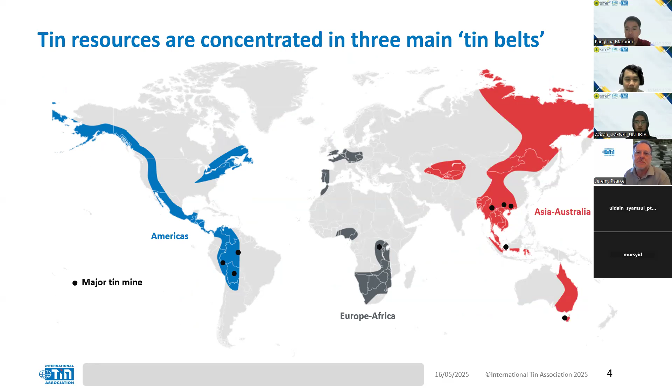So the tin resources are concentrated here in three main belts. You can see here in this diagram. The black one in the middle is the European belt with Africa, the Asian belt, which is over your side of the world there, and the South American belt. So this explains why these tin producers are in these places, because that's where the tin is.

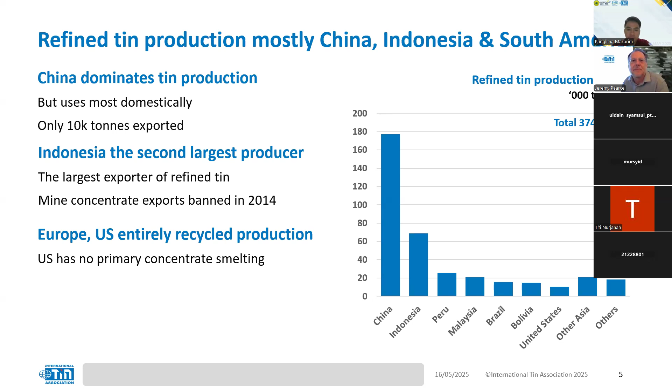8% is lead acid batteries, so that's in your car and elsewhere. And tin copper products are also very important. Those are bronzes and other things. It's a long time since the Bronze Age, but bronze is still widely used. And lots of alloys as well. Molten tin is used to make glass windows flat. You may not realize that. So you can see here how important tin is to our world.

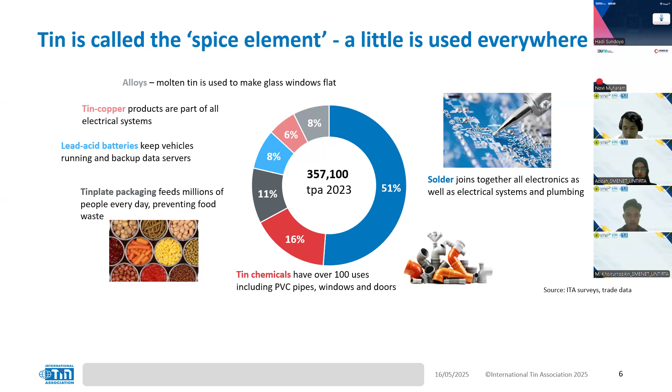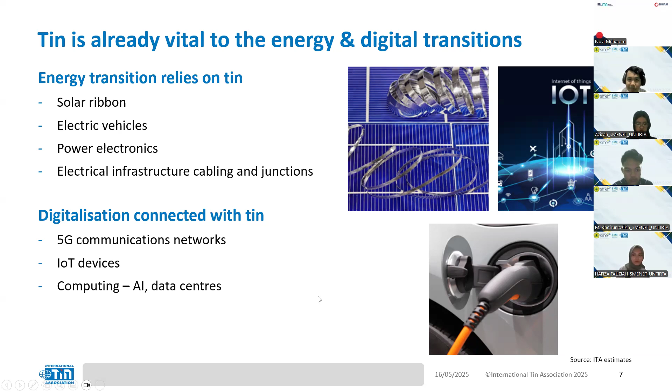If you think about electric vehicles, the glue that holds all the electronics together there, if you think about power electronics, think about everything that's needed for renewable energy, tin has to be very, very important. Not just that, but also digitalization. So we have 5G and the Internet of Things and all the communication networks, everything to do with AI, to do with data centers. Every single data byte has to go through millions of solder joints. So it's very easy to understand why tin is already vitally important.

But I guess this is mainly the reason why we wanted to talk to you today, because we are now seeing a lot of new opportunities for tin in R&D. Tin is such an amazing metal. It has so many different properties that it can do lots of different things. And that means that when you're looking at the technologies we need for energy transition, lots of different opportunities are coming along. And we're starting to look at some of those.

So Georgia is going to talk a little bit in a moment about sodium-ion batteries, which is one of the latest new energy technologies. That's very, very interesting for tin. But there are lots of others. For example, I mentioned already the solar materials, but there's a new material called perovskites, which you may have heard of, which is a very thin, invisible coat of material that we put on windows, for example, rather than on panels as they are today. And those are made with tin.

Thermal transfer: there's a big new investment in the US in batteries which use tin metal for thermal transfer. Carbon capture catalyst, carbon capture very important. So tin is very catalytic, so we're seeing that there too. Fuel cell catalyst, many, many other different ones. And we're tracking lots of other new applications in water treatment, electronic materials, even quantum computing, would you believe? Tin is vital to quantum computing.

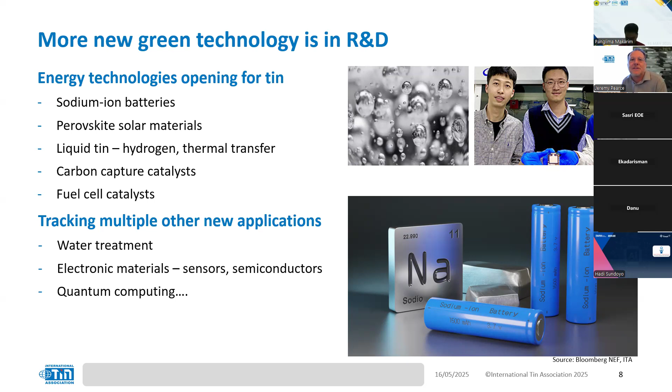So this gives you an example of the kind of things. We're tracking hundreds of new scientific papers on tin at the moment, and it's very, very interesting. So what we want to do as the Tin Association, we want to create some spaces, and that's why we're so keen to be with you today. We want to open up some spaces where people can come together, tin researchers from all over the world. We can showcase tin technologies and see some of the examples that I've highlighted, show how important tin is going to be for the future. And what we really want to do is encourage those conversations and accelerate the innovation.

We're going to focus on two strategic topics: tin in sodium-ion batteries and tin recovery from e-waste. Both of those we think are going to be the two most important topics for tin in the near future. Tin in sodium-ion batteries because it's a huge potential use of tin, and tin recovery from e-waste because we really do need a lot more tin very fast, and we think that's the best way that we can have that new stream of tin from e-waste.

We also want to introduce the tin industry, and so all of our tin producer members have exhibit booths inside this innovation hub I'm talking about, with lots of presentations. It's called Tin Valley, which is like the Silicon Valley for tin. And I think some of you may be already signed up to it, and if you haven't signed up already, then you're welcome to contact Georgia and sign up here.

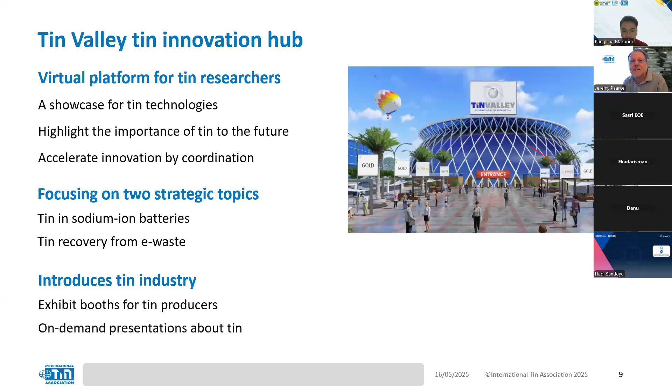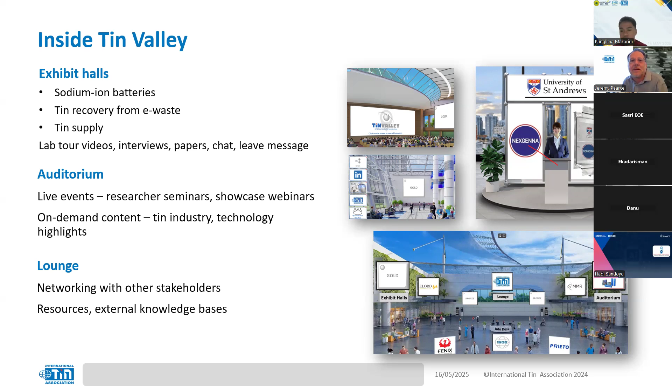Inside Tin Valley, you'll see these exhibit halls here with the booths like this one, with the universities and companies and startups already showing us some of these new developments. You can have a look through those together with the information that they have. There's the auditorium there. We have some live events. We have a live event on tin in sodium-ion batteries coming up shortly in June, another one on e-waste in September. There's lots of on-demand content too. Once you sign up, you can see all of those things. And there's a lot of functionality to network with other stakeholders and other people who are inside this space. So please do come into this space, find out more about tin, and get involved in what we're trying to do.

But we also want to do what we're doing today. We want to build tin researcher communities out in regions as well, real-life tin communities. Already we're starting to work in China and start building communities there. But in other places too, in Europe, we have good contacts with Fraunhofer and some of the other universities there, in the US too, and in Malaysia. But here in Indonesia, we're very happy to be in touch with you and to start building these communities there, to start talking and working together about how we can collaborate, how we can get some funding and start to do some exciting and new interesting projects together. So that's our objective and something we can help to do.

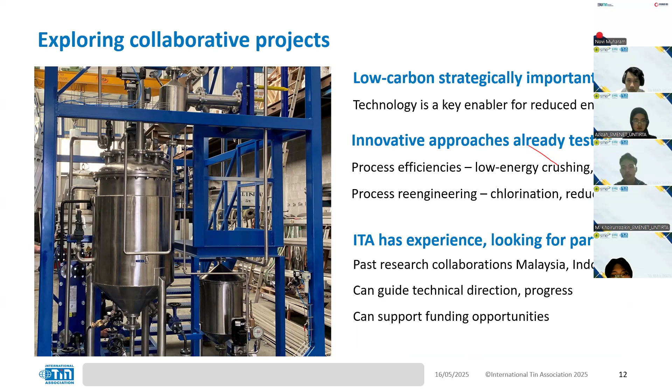And we can work with PT Timah in helping you to do that too. So with these ideas in mind, we think that these are the kind of projects that we might want to think about, apart from what we've already mentioned. These are low carbon projects, for example. So reducing carbon footprint is extremely important for the tin industry as it is for everybody else.

And technology is the key to all of those things. So we already tried a lot of different things in the past, and we want to explore those again. So how can we make the process of tin extraction more efficient? How can we use low energy crushing, for example? There are many different ways to crush things that are much lower energy. How can we deal with the fines, which is a particular problem in Indonesia?

I have to highlight that one. How can we deal with the fines content? That causes a lot of losses, and there are ways to do that. Plus, how can we re-engineer the whole process of tin? How can we look at that in a radical new way?

And for example, chlorination: instead of taking the tin ore and smelting it to tin and then adding chlorine to make a tin chloride, why can't we just go straight from the ore to a tin chloride? Well, you can, and we've done that already, and we can show you how to do that.

Why can't we, instead of using carbon, use hydrogen to reduce tin and make metal? Well, you can, and a paper has just been published on that from Freiberg in Germany last week. So we want to look at hydrogen to make tin from ore, for example. These are very exciting, new, interesting areas, and we'd really like to talk to you about how we can do those things.

We do have the experience. We've already had past research collaborations, including in Indonesia with tekMIRA and several others in the past. We can guide the technical direction, we can guide the progress, and we can support the funding opportunities. So that's what I would like to do if we can. Thank you for that.

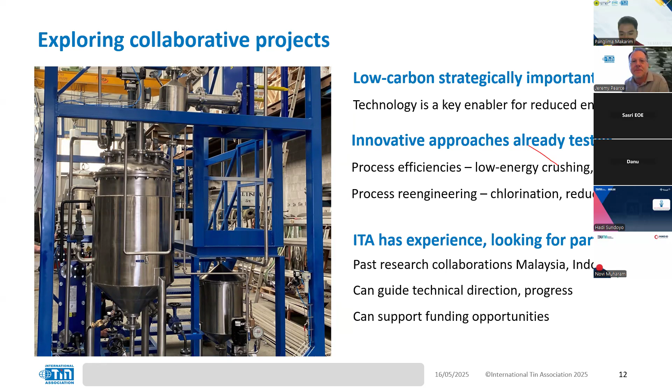Thank you very much, Dr. Pearce, for your informative presentation on the International Tin Association, Tin Valley, and the current tin markets.

Now it is my pleasure to introduce our next speaker, Ms. Georgia Laurie, a technologist at the International Tin Association. Ms. Laurie holds a degree in chemistry from Loughborough University and has been instrumental in advancing the Tin Valley initiative, a pioneering innovation hub dedicated to the sustainable development of tin applications. Her work focuses on exploring tin's expanding role in emerging technologies, including electric vehicles, photovoltaics, and sodium-ion batteries.

Today, Ms. Laurie will share her insights on the progress of the Tin Valley Initiative and its impact on the industry's future. Please join me in welcoming Ms. Laurie. And Ms. Laurie, the floor is yours.

Thank you very much. I'm just going to share my screen. Hopefully you can see that presentation. Yes, we can. Perfect.

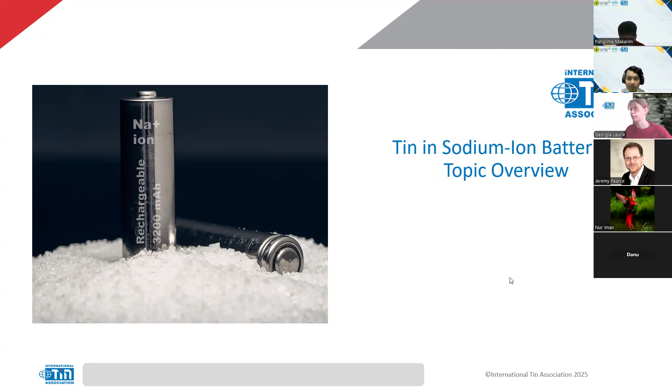So hello, everyone. I'm going to give a brief presentation to introduce two key technology topics: tin in sodium-ion batteries and tin recovery from e-waste. So I'll start with the topic of tin in sodium-ion batteries. Sodium-ion batteries, or SIBs, are a promising alternative to lithium-ion batteries. They work in the same way as lithium-ion batteries, just with the replacement of lithium ions with sodium.

So there are several advantages to SIBs. One reason is that on a resource level, sodium is more abundant in the Earth's crust, making its supply chain more reliable, which drives down the cost of resources, meaning that sodium is cheap. Lithium, on the other hand, is a more scarce resource; its reserves are less than 0.01% of the Earth's crust, with current high demand and supply chain constraints leading to price volatility.

Another benefit is that sodium-ion batteries are easier to transport, so they can be transported at 0 volts, whereas lithium-ion batteries cannot, and they face strict regulations due to safety concerns because they have a higher risk of thermal runaway fires compared to sodium, which can be really deadly and difficult to control.

Additionally, the use of sodium enables the use of aluminium current collectors at both electrodes, whereas lithium-ion batteries conventionally use copper current collectors. So this is good because aluminium is lighter and cheaper than copper, so we get to have cheaper and lighter batteries.

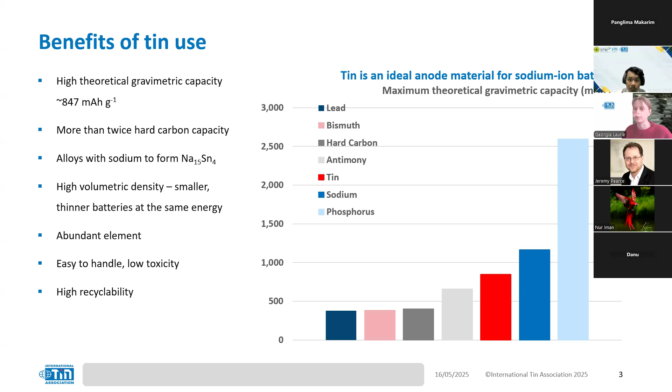If we look at phosphorus and sodium as well, they both exhibit high gravimetric capacities, but they suffer from issues including volume expansion, sluggish reaction kinetics, and sometimes complex synthesis processes for phosphorus. And then sodium anodes suffer from dendrite formation. So what I mean by dendrites is they are branches of sodium that are formed inside the battery. And these branches can be sharp and they can pierce parts of the battery, leading to short circuits. So because of these issues, tin appears to be an appropriate choice for a great anode material in sodium-ion batteries, but it doesn't come without its own issues.

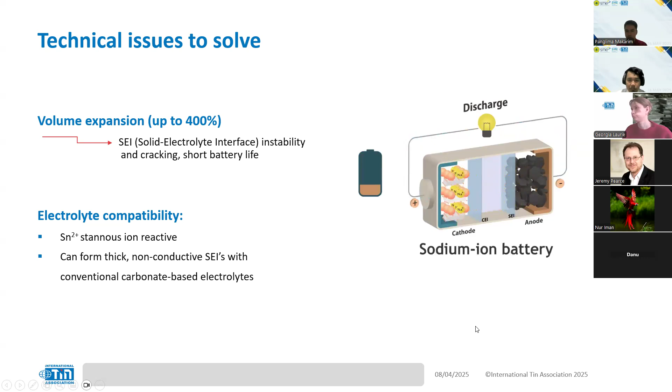So the question is, how can we overcome these challenges? And there have been solutions that have been developed, which is fantastic. So if we look at the issue of volume expansion, some of the methods being used are nanostructuring, for example, which uses very, very tiny nanoparticles of tin, which, because they're so small, have a larger surface area and create a more flexible material. And so because of this, they can better accommodate the volume expansion and avoid cracking.

Additionally, we can alloy tin with other metals, or we can form composites with materials like carbon, for example. And these materials can help to buffer the volume expansion by, again, increasing flexibility and also absorbing some of that expansion. So if we look at tin hard carbon, for example, these composites can use porous carbon materials, which essentially have holes in them for tin, which not only makes it more flexible, but also creates a matrix that can hold tin in position.

If we look at the issue of reactivity with the electrolyte, there have been some solutions developed, such as the development of glyme-based electrolytes. So these are more compatible electrolytes with tin anodes specifically. So these electrolytes form thinner and more stable SEIs and react less aggressively with tin. So we don't get the same issues that we were seeing with the more conventional electrolyte materials.

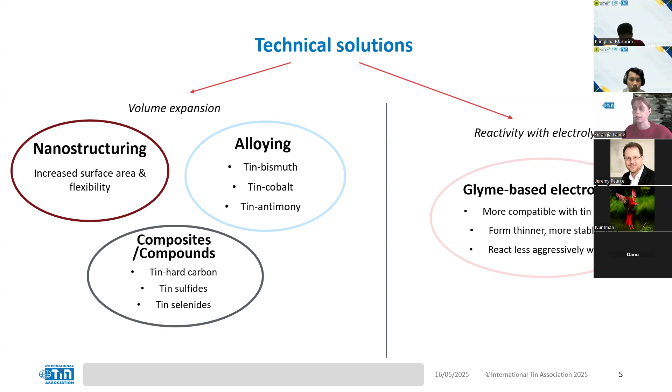But it's important to note that tin anode research is less advanced than hard carbon research, for example. But further research and development could boost tin anodes to be even more competitive because of the unique advantages of tin in this scenario.

At ITA, we are tracking developments in academia regarding tin anode materials. Some of the most common research materials in the last year include tin selenides, tin sulfides, tin carbon materials, tin oxide, and also elemental tin/tin alloys. You can see a lot of different examples of tin composites here.

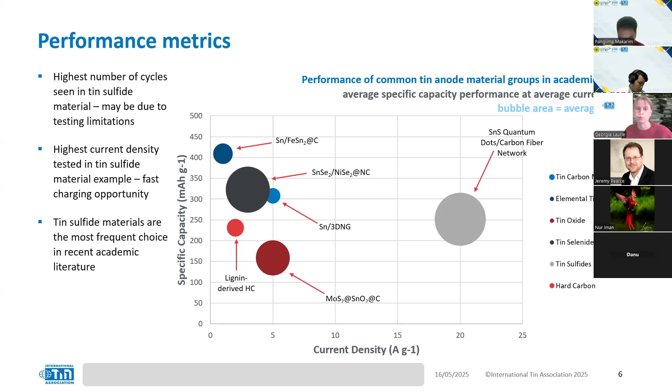In terms of development, research into tin-based anodes for sodium-ion batteries has been on the rise, particularly over the past decade, with 995 academic papers between 2015 and April 2025, expected to grow in the second part of this year. Of these, 72% originated from research in China, 11% from the US, 9% from South Korea, and 6% from Australia.

This again highlights China's dominance in the sodium-ion battery field, further emphasized by their government backing and resource dominance. China is also dominating in the commercial field of sodium-ion batteries, with battery giants such as CATL, BYD, and also HiNa Battery.

There are also companies implementing tin anodes into their sodium-ion battery technologies commercially. We have two contacts we are in touch with: Unigrid in Sweden and Nanode in Canada, both using tin anodes already in their sodium-ion batteries. We're also aware of existing sodium-ion battery companies evaluating tin as a viable option for their technologies. We hope to see more companies doing this in the near future.

A good place to start is defining what e-waste actually is. E-waste, or electronic waste, is discarded electronics that have reached their end of life. It encompasses a large range of products, from laptops and phones to irons and vapes, or even EV batteries. We require electronic products not only for everyday life, but for the transition to cleaner energy. The issue is that e-waste is now the fastest growing waste stream globally, with 62 billion kilograms generated in 2022. Of this, only 22% was recycled, with the remainder being dumped or shipped to developing countries without the infrastructure to safely and efficiently recycle it. This is a shame because the metal content in e-waste is often higher than that from mining, so efficient e-waste recycling is essential.

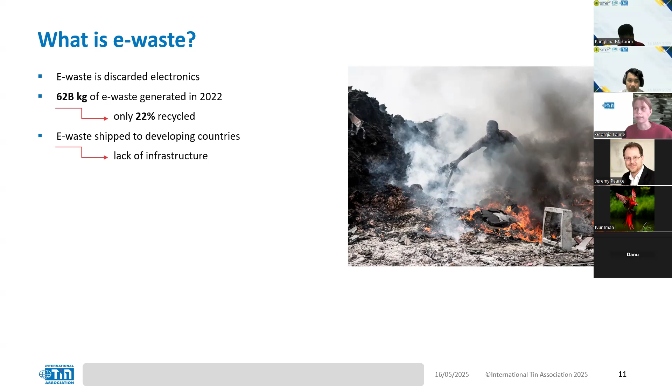So where does tin come into play? Tin is an essential part of electronics, used for soldering components and ensuring electrical connections throughout. Printed circuit boards, PCBs, which are an integral part of electronics, contain an average of 3% tin. So this potential secondary supply of tin from urban mining e-waste is essential now more than ever as the demand for tin rises.

Focus in industry, however, is often on the recovery of other metals from e-waste, such as gold, other precious metals, and copper. But people are actually not aware of the quantity and value of tin in e-waste.

If we look at the global landscape of e-waste generation, it's clear that e-waste production is highest in Asia, which can be linked to Asia's large population. But if we look at it from an e-waste generation per capita, so per person, Europe is actually highest, meaning Europe has more electronic devices per person than any other part of the world.

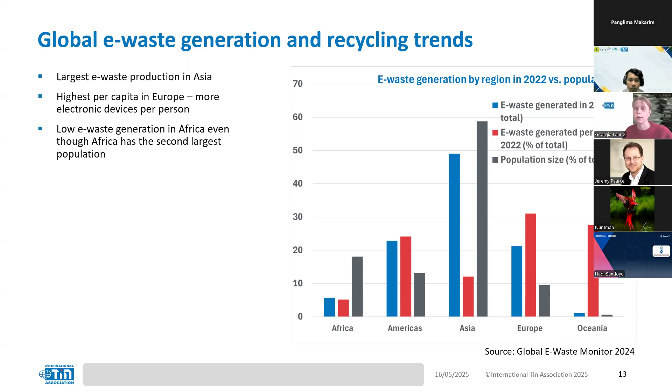In terms of recycling rates of e-waste, Europe has the highest rates. This is due to principles in place such as the extended producer responsibility, or EPR principle, which holds electronics companies accountable for their products once they reach end of life. We can also see high recycling rates in Oceania, particularly due to recycling giants being positioned within parts of the continent with large populations, such as Sircel in Australia and Mint Innovation in New Zealand.

But more is needed globally to tackle the rise in e-waste and to ensure valuable metals are being recovered.

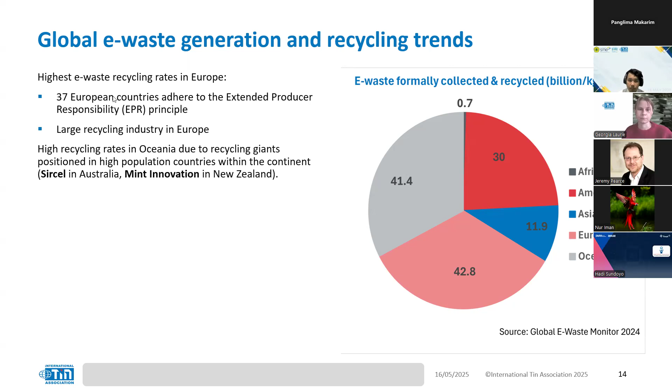If we look at e-waste itself, it comes in many shapes and sizes, and a crucial part of a lot of e-waste products are printed circuit boards. PCBs are usually concentrated with valuable metals for recovery, and so are targeted by recyclers. You can find these in phones and laptops, for example. They are made up of roughly 30 to 50% metal and 50 to 70% non-metal, again with an average of about 3% tin. One downside is that they also contain hazardous materials, including lead and flame retardants, that can be problematic for recyclers.

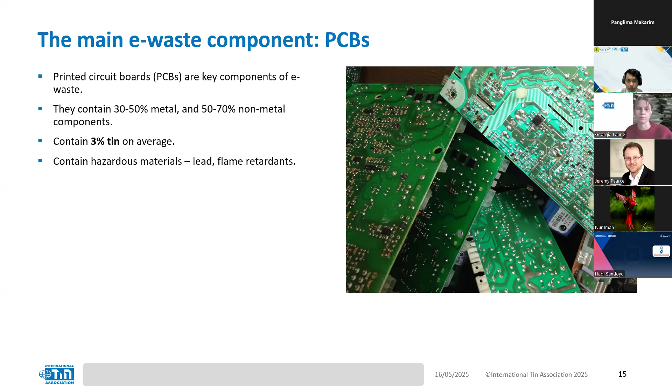So how do we recycle PCBs, and what are the most effective methods? To start, e-waste needs to be sorted and dismantled to isolate PCBs for metal recovery. This can be done manually, but it's time consuming, not cost effective, and also dangerous for workers, so it's highly recommended to be avoided.

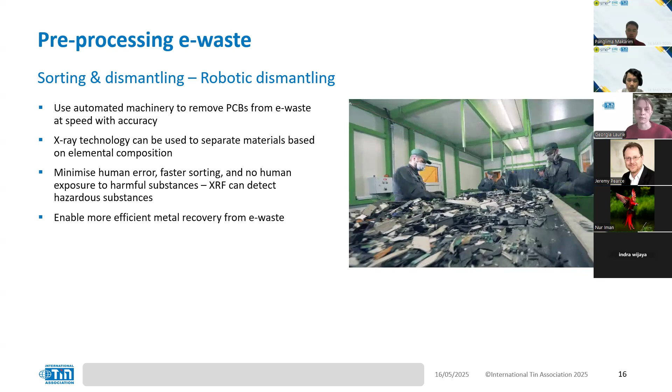Robotic and automated machinery is actually the best way forward, and we can also include spectroscopy methods. XRF, for example, can be used to identify elemental composition in components to help separate different parts of e-waste based on what they have inside.

So once PCBs are isolated and sorted from the bulk of material, there are many different processing routes that can be followed to recover tin amongst other metals.

If we look at a direct route for tin specifically, we could use chemical or thermal depopulation, which directly removes the solder material. Thermal depopulation uses heat to melt the soldering material, along with external force, such as shaking a board, to help remove the PCB components while melting the solder. Chemical depopulation is similar in that it uses chemicals to dissolve solder and recover metals.

The International Tin Research Institute, which is now ITA as we know it, collaborated with Ultromex in the past to use ferric chloride and nitric acid to recover tin from PCBs. And in fact, Jeremy was a part of that project.

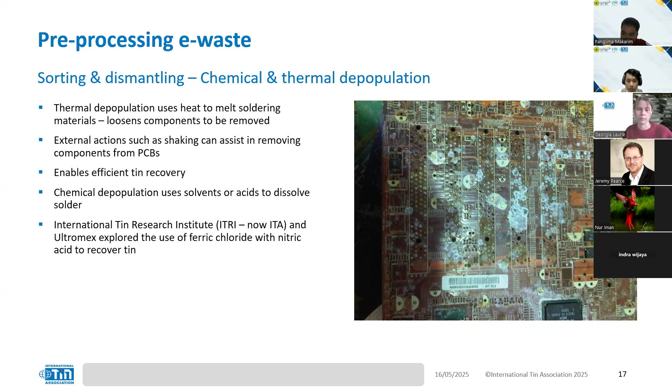An alternative route is to start by shredding the PCB material. If recycling companies want to target more metals and bulk recover metals from PCBs, they can start with techniques such as shredding the material. The perks of shredding are reducing the volumes of e-waste, making it much easier to handle as it can be condensed. For example, if we were to place a lot of PCBs into an acid bath or into a furnace, if the material is shredded up and condensed, it's a lot easier to fit more material into the furnace or the acid bath.

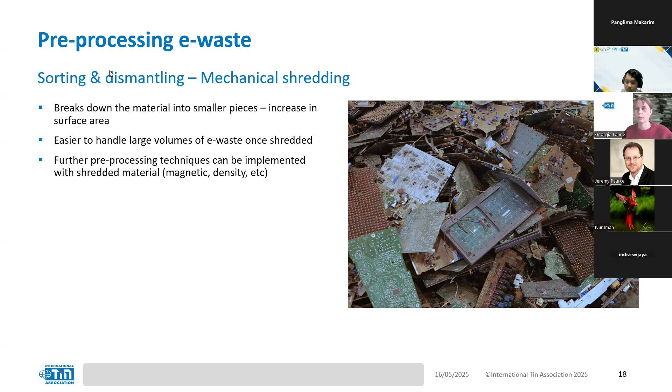This is also good because shredded material enables further pre-processing techniques to be employed, such as magnetic, eddy current, and density separation. Magnetic separation is self-explanatory in that it separates magnetic ferrous metals such as iron and steel from non-magnetic, non-ferrous metals such as tin, copper, aluminium.

Eddy current separation actually separates non-ferrous metals from each other based on varying conductivities. So in some cases, we can separate tin from aluminium, for example. And then we also have density separation, which separates components based on weight, either in an air or water-based environment.

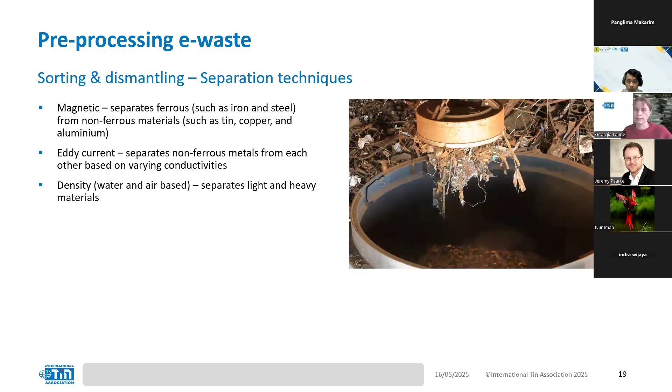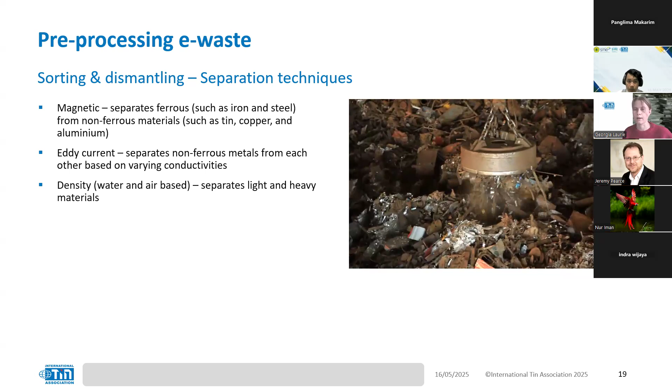These are really great methods just for initial separations of metals. And the reason this is great is because it makes it a lot easier down the line if we have metals broken up into different groups so that they can avoid interfering with each other as much in later processing.

One of the major metal recovery routes is hydrometallurgy. This involves using aqueous solutions such as acids or alkalis to recover metals from e-waste. The core steps usually involve leaching tin into solution, separating and purifying the tin-laden solution to recover the tin.

Leaching tin from e-waste using acidic solutions requires careful reaction conditions. Simple acids alone can sometimes struggle with leaching tin. It's found that using an oxidant improves the solubility of tin ions. For example, a recent study combined hydrochloric acid with sodium chloride to enrich the chloride content, which resulted in almost 95% tin leaching from the PCB material.

But the one challenge really with acid leaching is reprecipitation when tin 2 plus is oxidized to insoluble tin 4 plus.

Alkaline leaching, on the other hand, uses strong bases to dissolve tin, forming soluble stannate products. One of the main advantages of this over acidic is it's more selective for tin and lead, for example, and can leave behind less soluble metals in alkaline media, such as gold.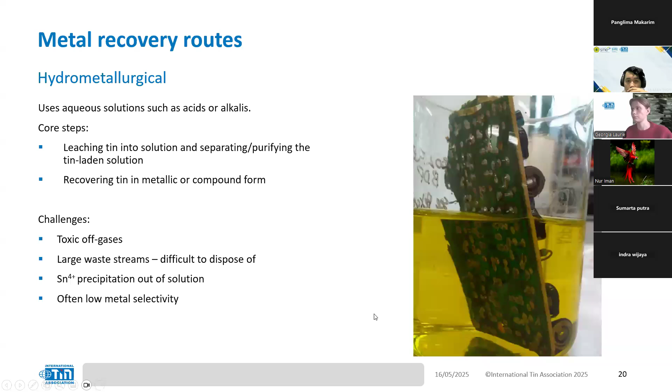Another major metal recovery route is pyrometallurgy, which uses high temperatures to liberate and separate metals from e-waste. Pyrometallurgical methods encompass various methods, including incineration, smelting, and also more novel techniques like flash joule heating.

Incineration involves burning e-waste in the presence of oxygen, primarily to oxidize and remove organic substances, such as plastics and resins, and then concentrate the metals in the remaining ash. This is usually a pre-treatment step to reduce e-waste volume and produce metal-rich residue. The residue can be further refined via smelting or leaching. After incineration, tin is often left behind mostly as an oxide or metal particles mixed with other ash constituents.

Modern incinerators include off-gas filtration systems, so they can capture any metal-bearing dust or vapor for further refinement. Smelting, on the other hand, is another core method for metal recovery, and obviously is already used at industrial scale. So during smelting, e-waste is melted inside a furnace at high temperatures with the goal of segregating metals into a molten metallic phase and a molten slag phase.

So by adding appropriate fluxes and reductants, the smelting process can be tuned so that valuable metals collect in the metal alloy at the bottom of the furnace, while other oxides of less value go into the slag. So industrial smelters can mitigate metal losses by operating under slightly reducing conditions and also capturing those furnace off-gases.

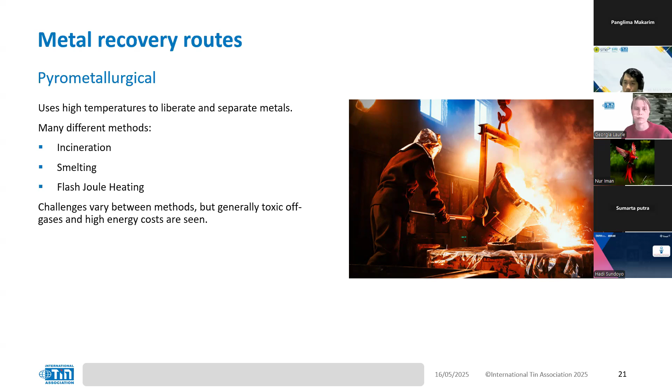So while pyrometallurgical methods are effective for processing large volumes of e-waste, they do require high energy input and often result in higher emissions. And additionally, further refining processes are typically needed to extract pure tin. But despite these challenges, pyrometallurgy offers a promising solution for the sustainable recovery of tin, especially as demand grows.

So if we look at some next generation innovations that are being explored to recover tin from e-waste, deep eutectic solvents are an example. They are a mixture of solvents that form a eutectic mixture with a lower melting point than any of the individual solvents. This is great because it tends to use greener and less toxic solvents, but it also means that we can melt that mixture at a lower temperature, so we don't have to use temperatures as high. And we can tune these mixtures by altering ratios and concentrations to alter its properties, depending on our target metal, for example. So this method is being trialed not only in academic literature, but commercially.

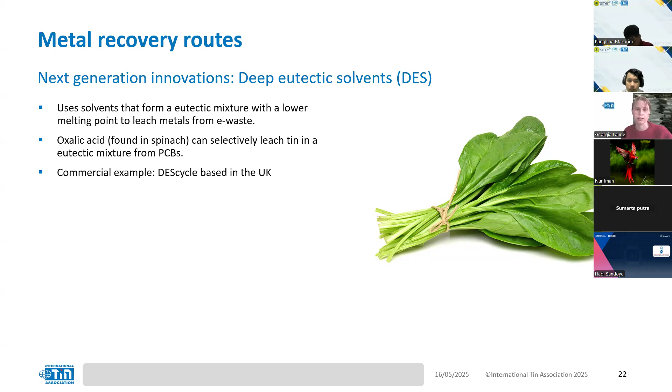Another example is bioleaching, which uses living organisms to extract metals from circuit boards. So we don't need to buy toxic chemicals. We can get living organisms to do it for us. An example of this in academic literature is that academics used two types of microorganisms to leach tin from powdered PCBs. And in fact, after 28 days at 31 degrees Celsius, they leached over 96% of tin. But the challenges they addressed in this paper were scalability as a potential drawback and also leaching time. But bioleaching is definitely being trialled commercially. One example is Bioscope in the UK, who are looking to optimize the time and scalability of this process.

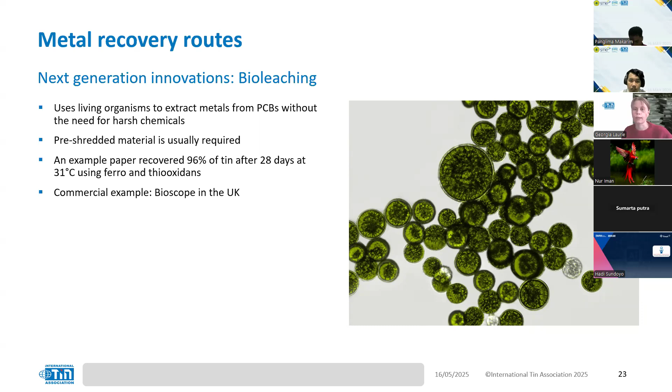And finally, one final way to improve the recyclability of e-waste is actually adapting the design of PCBs themselves. This is being explored by several companies globally. One example is Jiva Materials in the UK. They specialize in their Soluboard design, which is a PCB made of materials that can dissolve in hot water. So this is fantastic for the recyclability of the metals. Their Soluboard has a 67% lower carbon footprint compared to traditional technologies.

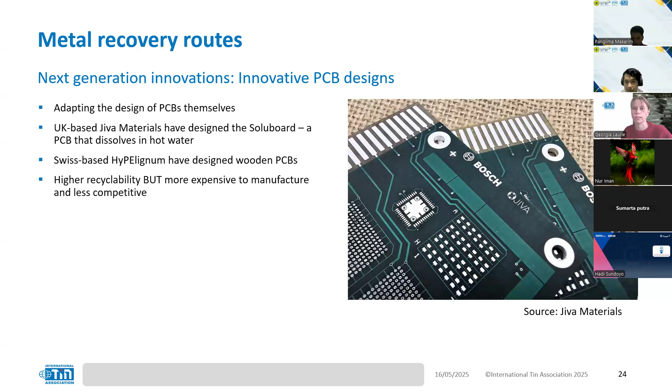But one drawback is the cost to manufacture more sustainable PCBs, which does make them less competitive. And also they need to be designed to endure heat and moisture effectively. So further optimization is likely needed.

So if we just quickly look at the research and commercial activity in this area, academic papers have been on the rise in the last 2 decades. The 3 countries with the largest number of tin recovery papers are China with 25%, India with 13%, and South Korea with 8%. So actually this highlights that there is a high concentration of research in Asia, which funnily enough is the region with the highest e-waste output.

There are also e-waste recycling facilities populated all over the world, with this industry growing year by year. So some examples include Aurubis in Belgium, who are known mostly for copper recycling, but they are also a tin and partially an e-waste recycler. Sircel in Australia, they're actually Australia's biggest e-waste recycler, and also Attero in India, they're India's biggest e-waste recycler.

So not only are companies doing this, but there are also collaborations between institutions and organizations working on this topic. For example, there's a collaboration between the French Alternative Energies and Atomic Energy Commission, or CEA. They're collaborating with Nanyang Technological University in Singapore on the topic of smart sorting of e-waste. So actually, someone from the Scarce Alliance presented at one of our conferences last year. So if you're interested in watching that, it's available inside Tin Valley.

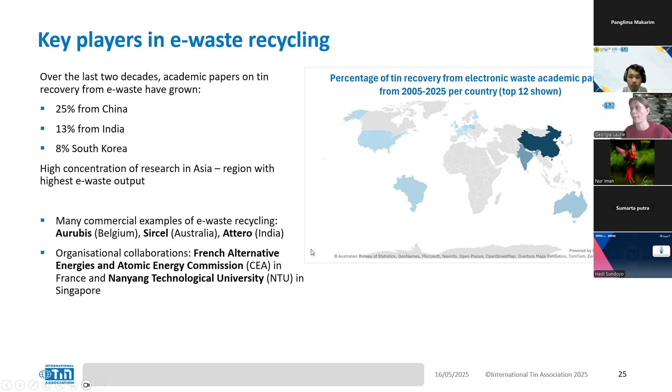So there are also regulations in place in regards to e-waste. So in the EU, a regulation related to the destruction of persistent organic pollutants, otherwise known as POPs, has been adopted. So POPs are chemical substances that do not break down easily and can therefore accumulate and risk being harmful to both human health and also the environment. And there are POPs inside e-waste, inside printed circuit boards.

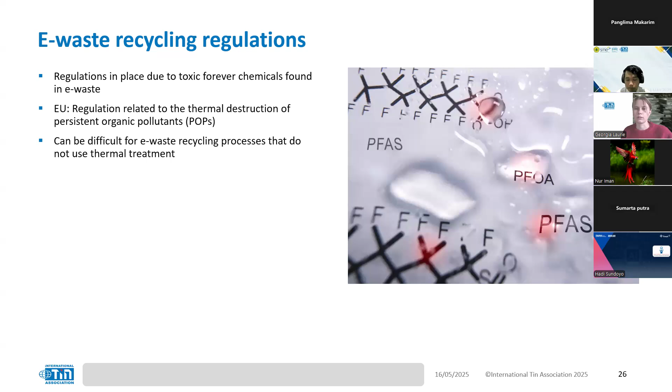So the EU regulation states that these POPs need to be destroyed thermally during the e-waste recycling process, so to minimize their risk. But this obviously can be a challenge for e-waste recyclers that are not using thermal treatment. So regulations like these add another level of difficulty to e-waste recycling.